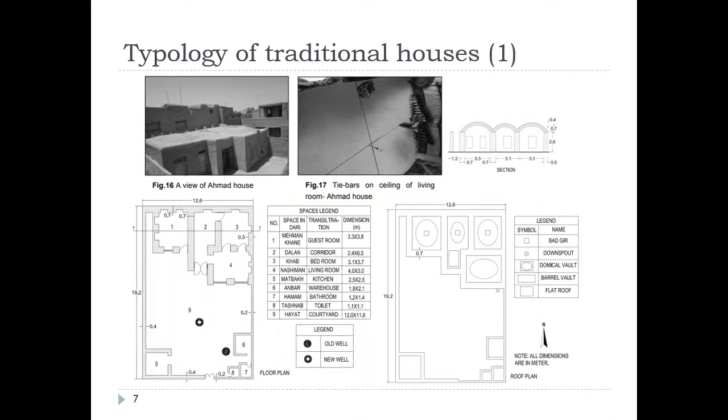In Herat, in this case, as you can see in this photo, they use metallic rods that push from two sides into the wood inside the roof. The weight of the roof is distributed in form of tension in these wires, so the thickness of the wall can be decreased to 50 to 60 centimeters. In this particular building, the thickness of these walls is 50 centimeters.

These materials are mainly ashes, lightweight materials. They mix them with soil and put it at the top to make the roof flat. In this case, they reduce the weight of the first floor, and then they can construct the second floor also at the top of this first floor. It's possible to use.

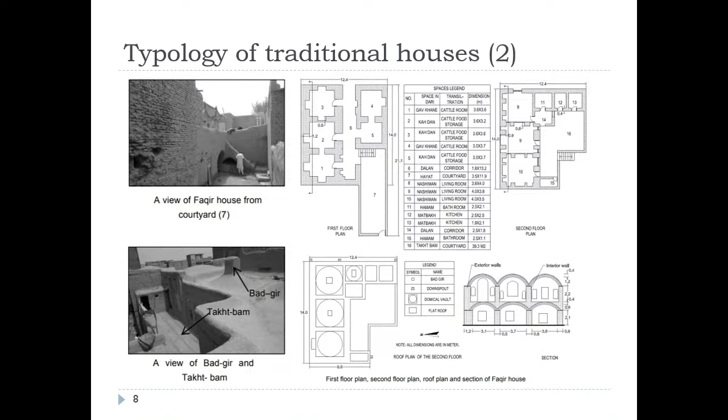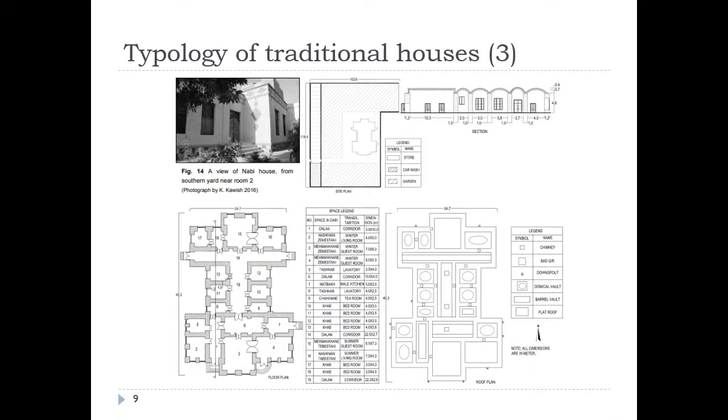The size of the dome can be much bigger depending on the type of the building, and usually in Herat the intention was to decrease this size of dome. The lower, flatter the dome, the more interesting the building was, because it required more advanced techniques to construct. For this reason, you can see in the section of this house the domes are lower than normal. They were trying to reduce the size of the dome. In Herat this is very common; it shows the prestige of the families who could construct a dome-roofed house with a very flattened shape.

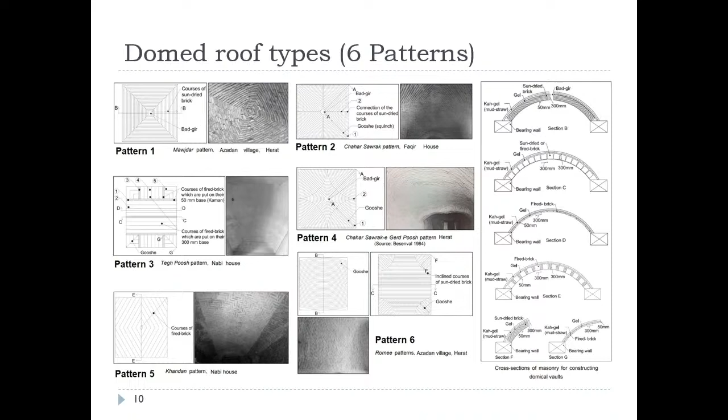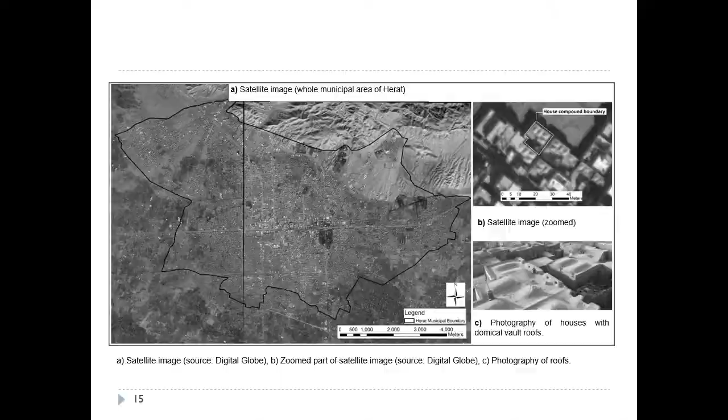So we defined the boundary of each building, identifying which is historic and which is modern with a flat roof. Based on this satellite image, we made a model of the city showing with black dots the density of these domical vault roof houses. As you can see, the distribution of this kind of domed roof house is not uniform; in some parts there is higher density, and in some parts there is less.

For example, in the north, next to the canal at the north of the city, there is more density. There are some other dense areas in this historic old city of Herat, and in the village of Gazargah in the top right, there are also more of this type of house, with more numbers.

To find the density, we divided the city into meshes of 100 by 100 meters and counted the number of these kinds of houses in each mesh to determine the density. We identified 7 sites with higher density of this kind of houses.

Site 1 is the biggest circle in the lower image. The lower left is showing the historic old city of Herat. Then there are, in the north, the village of Gazargah and the Bagdash. We studied each site separately, which I'm not going to talk about all of them today.

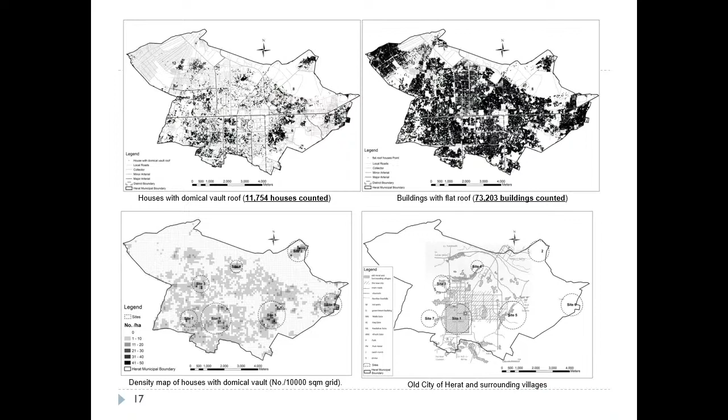Why is that? We studied the reasons why they are distributed in some parts and not in others. These are the cities of sites, and we put them in the image considering the historic early development of the site. There is site 1, which is the old city, site 4 is the Bagdash, and site 2 is Gazargah. Each one of these sites corresponds with some historic village which developed around the city. But some parts disappeared, some villages disappeared, or some sites like site 7 or site 6

in the right side of this map. Site 6, for example, has so many traditional houses in this place. However, this site is newly developed. So these kinds of constructions are not only historic houses, there are some new houses also.

With the dome roof shape, they are constructed by families, and the reason is there are some families with low income, let's say. They construct these kinds of houses in the margins of the city because of the cost; there is lower cost of construction. They start with living as a shelter and develop with local material with a cheaper value. They construct this kind of traditional style houses, so they are new old houses.

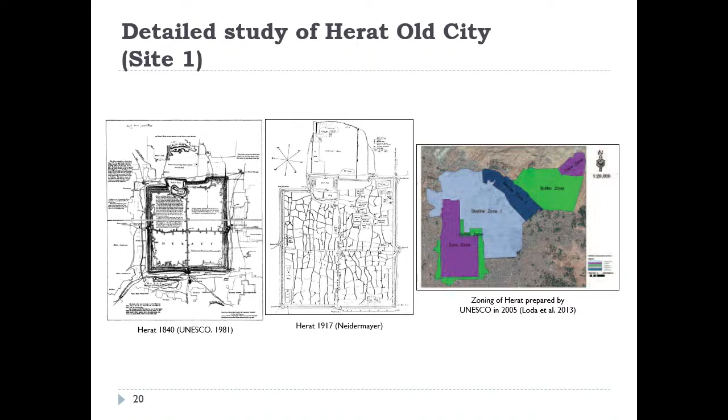There is also the zoning of Herat by UNESCO, which dedicates one core zone for Herat in the historic center of the old city. Then in the northeast, shown in purple, there's another core zone based on the rules of UNESCO. Then there is a buffer zone, the green side, that protects these core zones from change, and there is a skyline zone. Each of these zones follows a special rule, mainly related to the elevation of buildings and controlling the skyline. If you put these rules on a map, I've shown it like this.

For example, the sites in the north of the old city, based on the rule they set, buildings should not be more than 4 meters. Then within 1 kilometer around the historic city, buildings should not be more than 7 meters. As you go further from the center, there is permission for higher elevation, a higher skyline, let's say, buildings with greater height.

As you can see, this is a very generic regulation, and at the same time nonsense, I would say, since it's not possible to control this kind of regulation, and it was never actually applied in the city. It changed—they put this regulation in 2005, but nobody could control or implement it.

In 2005, along with putting this regulation and emphasizing the importance of the core zone of Herat, a company, a big organization, named Aga Khan Trust for Culture, AKTC, entered the old city and started making redevelopments and improvements inside the historic old city. These improvements were mainly spot improvements, improving some buildings, or network improvements like those shown on the map, improving drainage or paving streets, as you can see in the image at the bottom right of this slide.

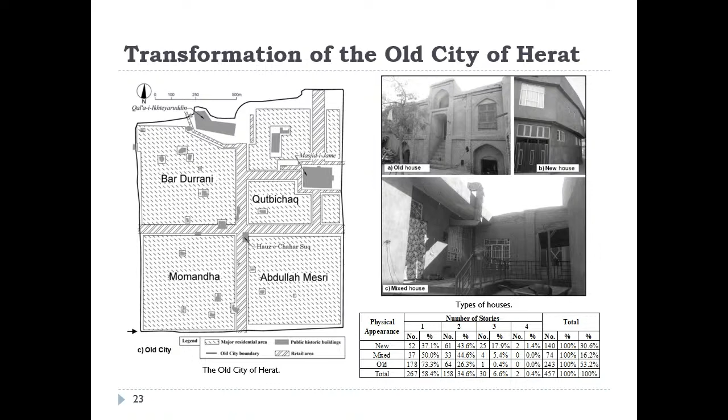Once we studied this, we found that the areas next to these redevelopments suffered more change, with demolishing of domed-roof historic buildings and construction of flat-roof new buildings. This happened in all quarters. In this table, based on data from 2017-18, about 30% of buildings are new, 16% are mixed, meaning a person had an old building, destroyed half of it, and constructed a new addition, and about 50% were still historic buildings in all quarters at that time.

This is the distribution, where the cross shows a new building, the triangle on the map shows mixed buildings, and the circle shows old ones. These are samples, about 500 buildings were sampled, showing how they are distributed in different parts of the historic city. You can see that in some parts the density of these flat-roof modern houses is higher.

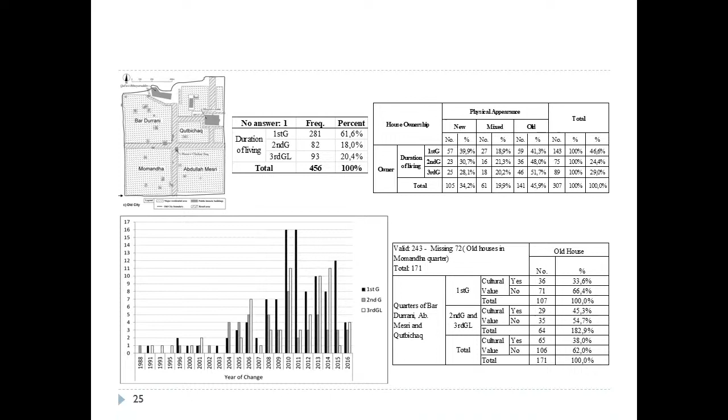But how did this happen based on the year? If you put it on a timescale, you can see that until 2003 there were not so many changes. Starting from 2004 and 2005, construction of new buildings started, and it continued until 2016.

If you put this alongside the improvements, you can see an increase after 2004, after the first presidential election in Afghanistan and the intervention of AKTC. It increased, then in some parts decreased, especially after AKTC left the site and after the end of the NATO combat mission, when people started thinking more about saving money rather than doing construction work on their homes, which is considered an investment for local residents. So it decreased.

From this slide you can interpret that the years of war, before 2001 and up to 2003, did not change the historic site so much. Basically, the years of peace in this region had a more negative effect, because people started to change the quality of their life. They couldn't resist staying in traditional houses and started to change the houses by type.

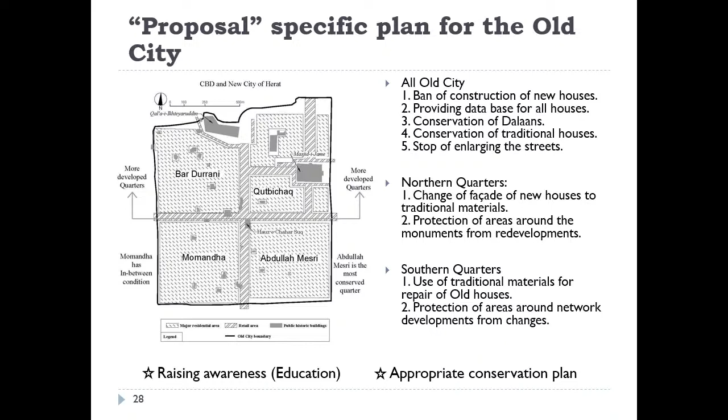They don't know, or they don't consider their property as cultural heritage. So raising awareness is general, but is one of the main facts. And then preparation of the appropriate conservation plan is also another key.

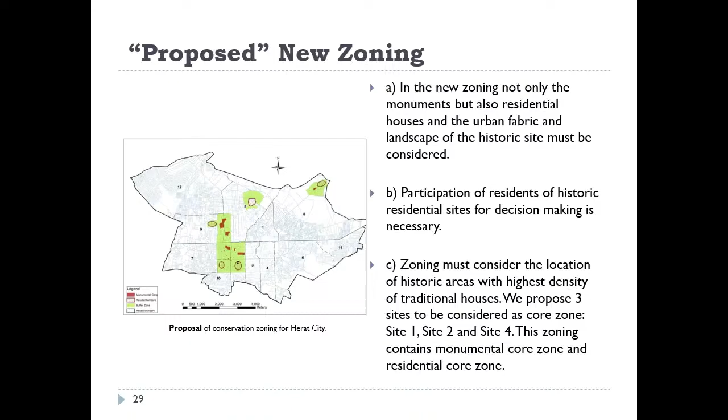Thank you very much for the attention.

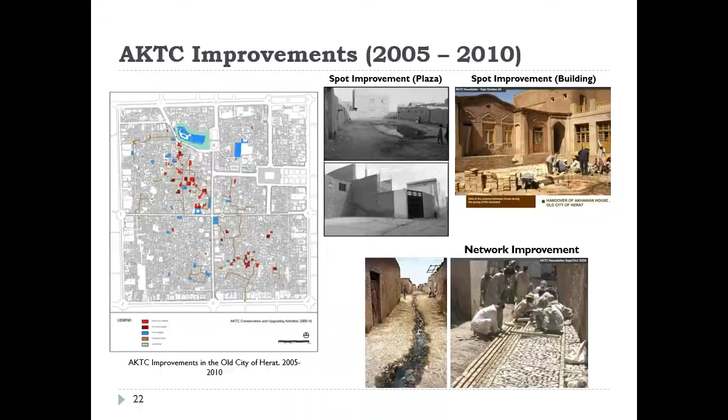They passed the water, and the water went to the main canals. You can see in this map on the left, that yellow line is the canal taking all the wastewater and putting it out of the historic site. This photo at the top shows the ditch, and below shows how the ditch is now covered with cement. These ditches were covered and turned into a plaza.

Now it's more like Florence. You can go inside the city, and those ditches have now become green space, an open place where the community comes and meets each other, away from the environmental issues. So technically speaking, they changed the ditch into a plaza.

Professor Samimi, thank you very much for this speech, for this conference. We hope we can talk much more about this very interesting topic.